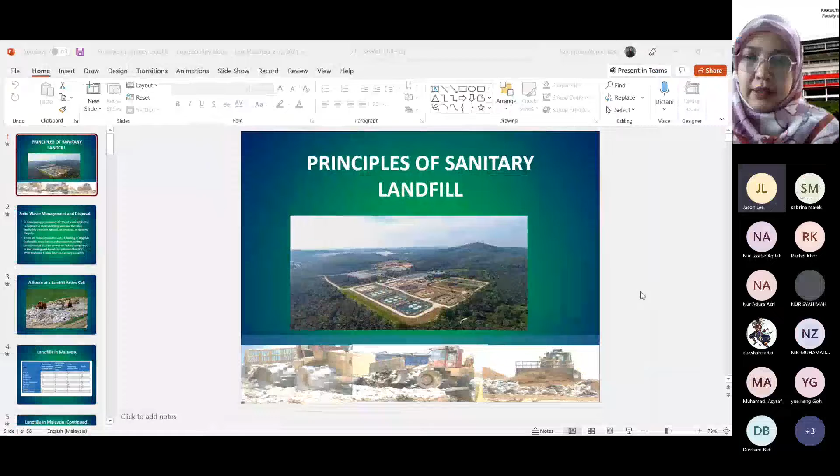Nampak Doktor. Boleh. Alright. Okay, we will continue on the topic of principles of sanitary landfill. Suara saya clear? Boleh dengar? Boleh Doktor. Okay, boleh.

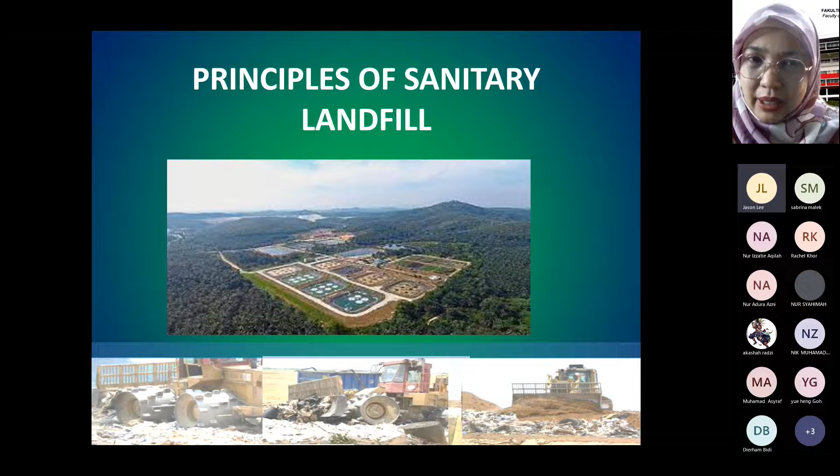Okay, bagus. So we have been discussing about previous treatment options: reduce, reuse, recycle, if possible, before the waste should be disposed at landfill. Landfill is a disposal land or disposal area. I'm sure that many of you have already seen how a landfill looks like, a place where we dispose our waste. Maybe later on I will show you the picture when you are entering the sanitary landfill.

So landfill should actually be a place for waste disposal if we cannot reduce, reuse, recycle, or treat the waste. It should be an option only for the residue of the waste that we generated. However, currently in Malaysia, our main method of waste disposal is using landfill, either sanitary landfill or a normal, general landfill.

So currently about 90 to 95% of our waste generated is being sent to landfill. And it has been so for more than 50 years. Our landfill in Malaysia has been there for more than 50 years. So can you imagine? Most of the landfills have already been full. Currently, it's already full.

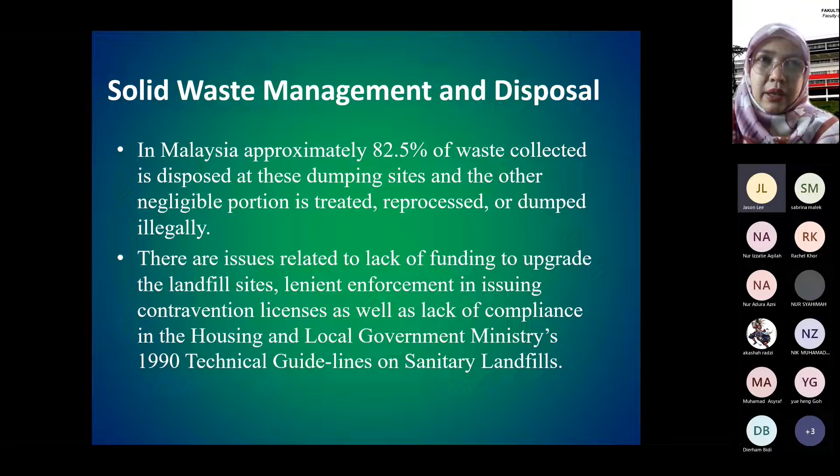Okay, so these are some pictures that I took from the internet. You can see at a landfill there could be various types of waste being disposed, and you can also see there are some equipment, some tools, that are being used at the landfill.

One of them here, if you can see, is the truck that collected the waste from our homes and sent it to the landfill. And here on the left side is what we call a compactor. The purpose of the compactor is to maximize the density of the waste so that more waste can be placed at the landfill.

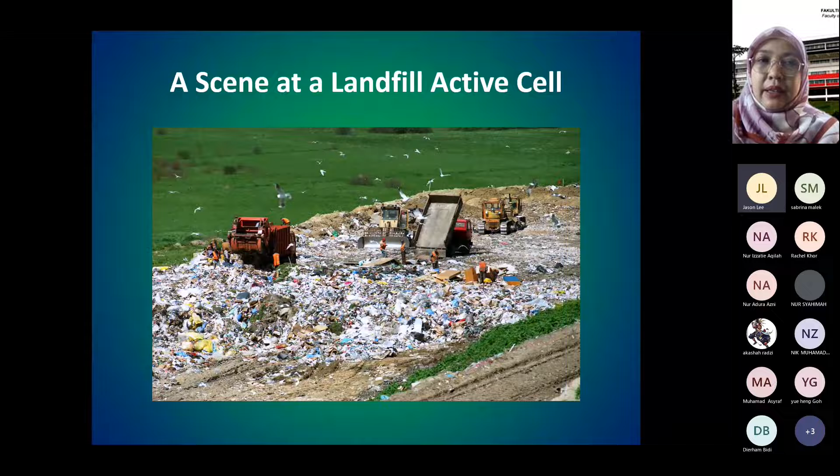So here we can see that there are at least 3 compactors at this cell. This cell is not really big because at the landfill, they don't open all the cells at one time. They will open one cell at a time so that erosion can be minimized. Okay.

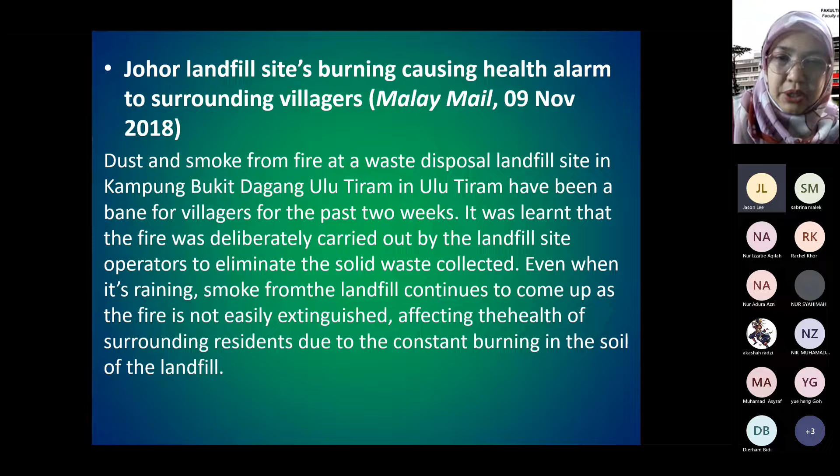So even when it's raining, smoke from the landfill continues to come up as the fire is not easily extinguished. Okay, next, Greenpeace Malaysia, on the 27th of November 2018. It says that Malaysia has become the world's rubbish bin. I think probably you have heard about this.

Developed countries, such as the United States, Japan, Britain, have done recycling activities in their countries, and then they have these recycling products. There was an agreement made by these countries with Malaysia, because Malaysia was thinking that we can take up the recyclable items and use them as a resource for manufacturing.

However, it was found out that most of the recyclable items exported to Malaysia cannot be used as a resource for manufacturing. So it turned out that most of the recyclable items need to be disposed in Malaysia. So it becomes mountains of waste in Malaysia, and that's why they call it the world's rubbish bin.

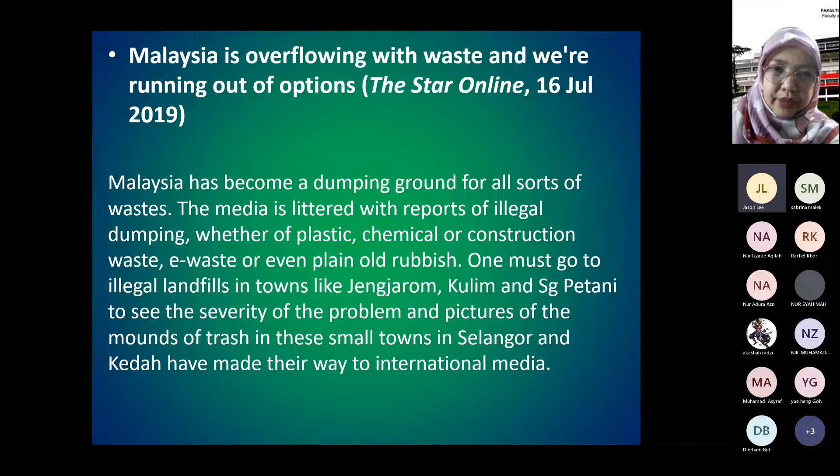So one must go to illegal landfills in towns like Jenjarom, in the Klang area. Jenjarom is one of the largest illegal dumping sites. Kulim, Sungai Petani, to see the severity of the problem and pictures of the mounds of trash. Another one is Jalan Gombak residents claim illegal landfill in KL causing air pollution, still in 2019. So these are the issues that we are facing with illegal dumping.

I've been discussing illegal dumping, and what does it really mean? It occurs when solid waste is discarded or caused to be dumped or placed on any property, either public or private, without proper authorization or legitimate purpose. Illegal dumping is a difficult issue that local and state governments must address on a continual basis.

Why? Normally, when waste is collected from our homes, commercial areas or institutional areas, it is authorized, by the waste operators, the collectors, together with the local authorities. There's paperwork, payment needs to be made. However, illegal dumping is without authorization.

So these are some of the pictures of illegal dumping, either in places nearby housing areas, somewhere people cannot really see when people are throwing it, or even nearby the rivers. So it's still happening in Malaysia.

So what are the causes of illegal dumping? Why are people doing illegal dumping? Firstly, because of lack of legal waste disposal options, which is the primary factor, meaning that a shortage of legal disposal options drives demand for waste removal services, increasing prices.

So as I mentioned just now, landfills are no longer nearby the city. So the operators need to transport the waste from the housing areas in the cities a very long distance. So what happens? They try to reduce the cost by illegal dumping.

Studies also found unit pricing, which involves charging a set price per bag of garbage thrown out, may contribute to illegal dumping, although the intent of unit pricing is to encourage people. So in some places, waste is charged according to how many bags you dispose of. This is not happening in Malaysia, but probably in some other countries such as Taiwan. So the number of bags that you throw is how much you have to pay.

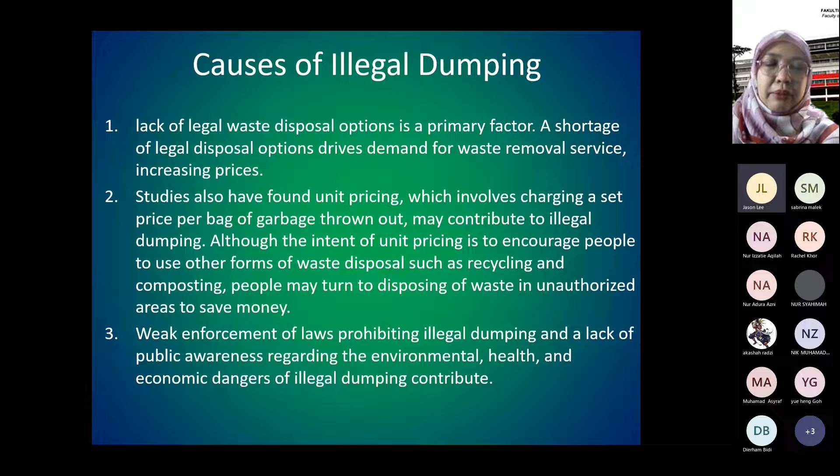So if they are trying to reduce the number of plastic bags, where do they send the waste? Yeah, so they will be sending the waste to illegal dumping. Okay, then weak enforcement of laws prohibiting illegal dumping and a lack of public awareness regarding the environmental, health and economic dangers of illegal dumping.

Okay, that's quite easy. So what are the effects of illegal dumping? The effects are health, environment and economic consequences, may sometimes lead to pollution of the surrounding areas, toxin and hazardous materials. As you have heard in Johor, in Sungai Kim Kim, people are disposing. This relates to toxic waste, or hazardous waste, that they illegally dumped nearby the river.

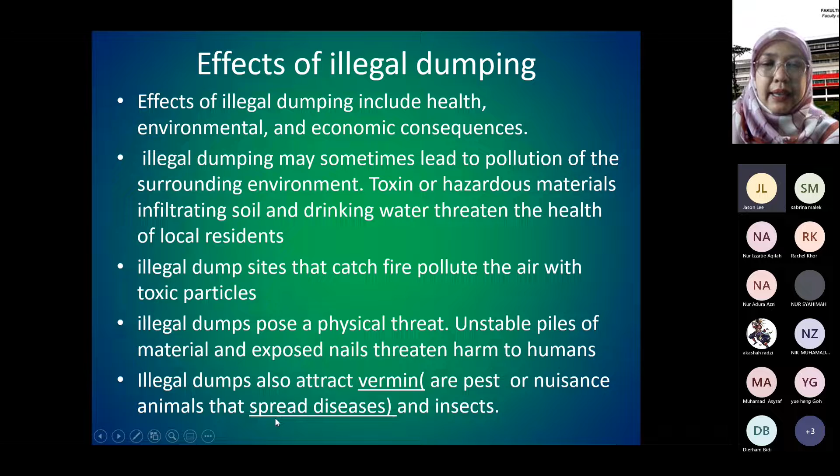Okay, and then illegal dump sites can easily catch fire and pollute the air. It poses a physical threat, and unstable piles and materials, exposed nails, threaten harm to humans, and then attract vermin, or what we call pests or nuisance animals that spread diseases, and insects as well.

Okay, so now back to the landfills. If we are talking about landfills, there are various types of landfills. You have heard about open dumping, landfill, I've mentioned it to you just now, sanitary landfill, and then hazardous waste disposal, or hazardous waste landfill, which is called secure landfill.

So there are various types of landfill, because what we thought is that when we send the waste to a disposal site or disposal area, we just call it landfill, or in Bahasa Malaysia tapak pelupusan. We call it landfill or tapak pelupusan. However, there are different types of landfill.

Okay, so the first one is open dumping. Open dumping is so simple. The local authority, Majlis Daerah, Majlis Perbandaran, used to have open dumping practices for waste disposal, meaning that they found an area which is suitable, close by the city probably, and then they just send the waste to this area and leave it there for many years until the land is full with waste. So that's what we call open dumping.

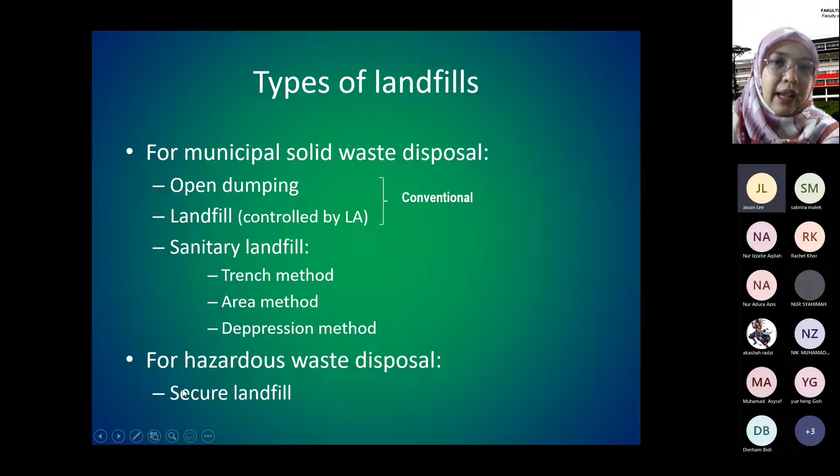And then people are also talking about hazardous waste landfill, and it is called secure landfill. Regarding this, we will learn about it in the topic hazardous waste management. Okay.

Okay, so the first thing is open dump. It is defined as a land disposal site at which solid waste is disposed of in a manner that does not protect the environment. So that's what I mentioned, it doesn't consider the environment. And it easily gets burning, and is exposed to elements, vectors, and scavengers.

Okay, scavengers, if you ever heard about scavengers, are people who work at landfills, sometimes illegally or legally. These people will take valuable items from the landfill that can be recycled. And they also mentioned that they've sometimes found gold or money that people accidentally threw away in the landfill.

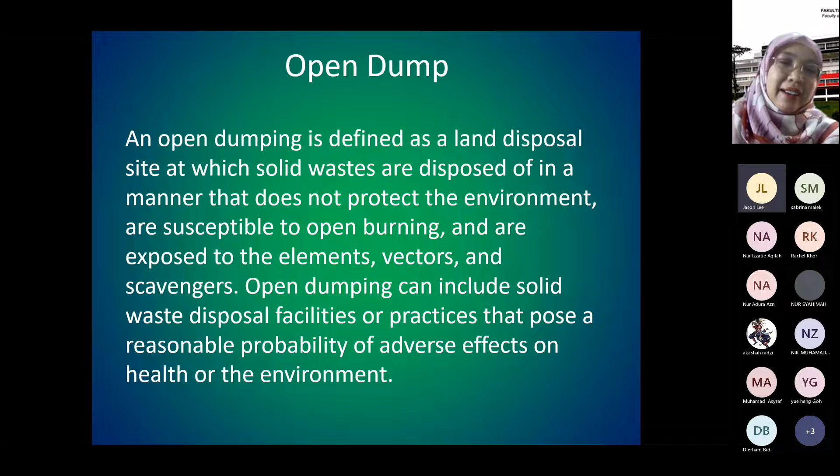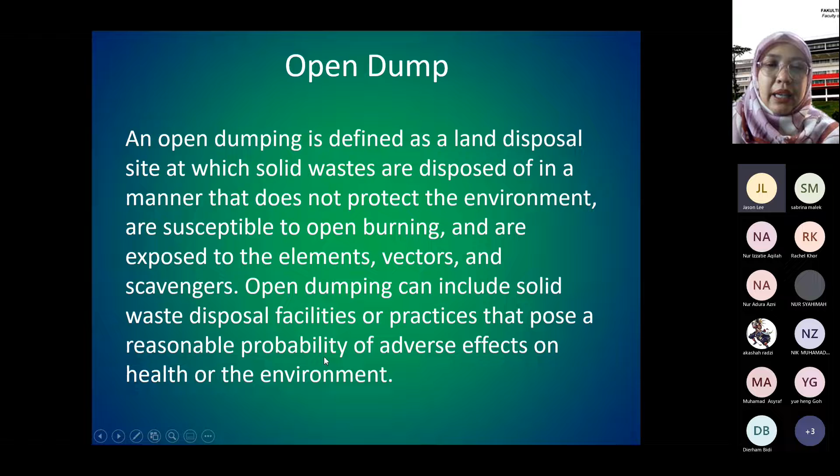So sometimes they can get, not that they can get really rich, but at least they can earn daily so that they can eat every day. So it's like a source of income to them. It can be a part-time job or a full-time job for them. Okay. So open dumping can include solid waste disposal facilities or practices that pose a reasonable probability of adverse effects on health or the environment.

Okay, controlled landfill. Landfill is the most common solid waste disposal method. So I mentioned just now open dumping. The second category is controlled landfill. This is the most common disposal method, and it is a simple procedure, low cost, with a landscape restoring effect.

The primary objective of landfill site design is to provide an effective method to control and prevent negative effects on surface water, groundwater, soil, and air. For final dumping of solid waste, the landfill is the most efficient way to settle the collected waste. So normally local authorities will opt for this option, which is controlled landfill with minimal environmental considerations.

Next, landfills. Even for landfills in Malaysia, there are various types that they can choose from. So it can be anaerobic landfill. Anaerobic landfill means that when the waste is dumped at the landfill site, oxygen could not get into the waste. So the biodegradation process will occur without oxygen. That's the first type of landfill.

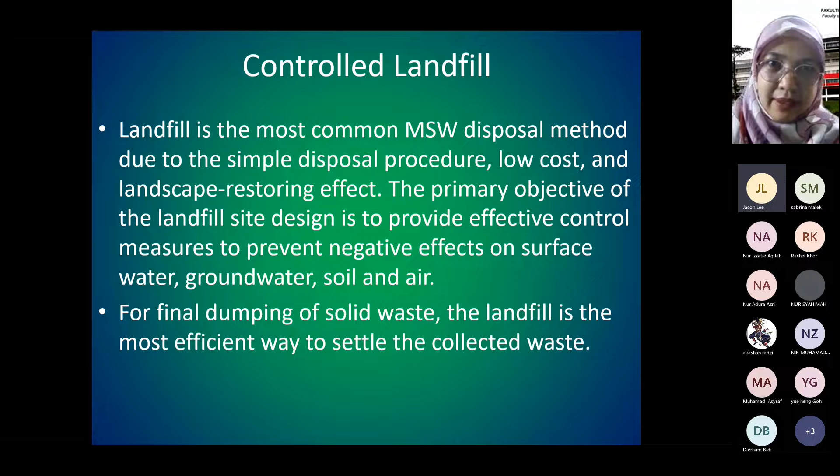And lastly is aerobic landfill with forced aeration. In some landfills, oxygen is introduced, and normally they use a blower to introduce oxygen to the landfill site. So I've already introduced to you open dumping, then controlled landfill, and even controlled landfill has different categories. The next one is sanitary landfill, which is considered the latest technology for a landfill.

So what does sanitary landfill mean? By definition, sanitary landfill is a land disposal site that employs the principle of spreading waste in thin layers, compacting the material to the smallest possible volume, and applying cover material at the conclusion of each operating day. Simply, sanitary landfill is an engineered method for land disposal of solid and hazardous waste in a manner that protects the environment. It has the maximum protection for the environment in terms of considerations and technologies involved.

Within the landfill, physical, chemical, and biological processes occur. It is like a very large bioreactor where the organic waste will be degrading naturally. However, plastics and other non-biodegradables cannot be degraded, of course. Only organic materials can be biodegraded. You can imagine these processes occurring on a large scale, degrading the solid waste and producing odor, leachate and gases. Sometimes if you enter the landfill site, you can already smell the bad odor.

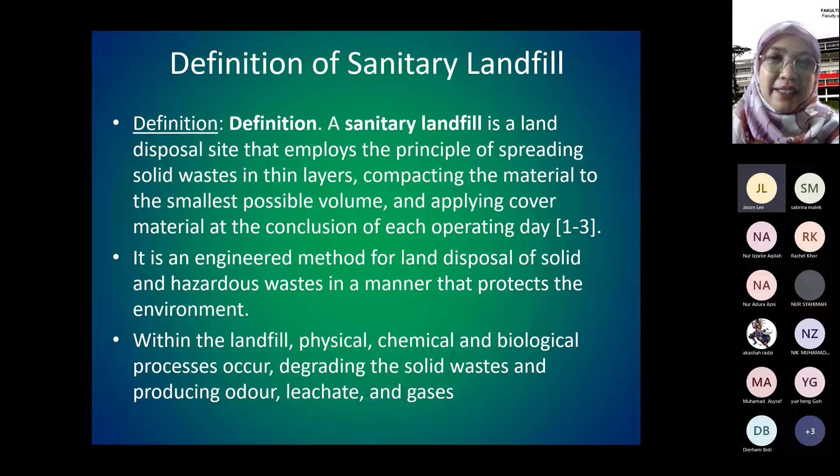Okay, no question. So what are the purposes of a sanitary landfill? Okay, the main purpose of a sanitary landfill is to ensure waste is safe by reducing the harm from accumulated waste and allowing safe decomposition.

Can you imagine if nobody collects the waste from our home? Even after 2 days, 3 days, if nobody picks up the waste from our home, the smell is really bad. You can see that the surrounding area doesn't look very good. So this job is very important to human beings. Manage the waste.

So the alternate layering of garbage and soil aids in hastening decomposition. Because methane, a toxic gas, is produced from decomposition, it is collected in a landfill to generate electricity. So in a sanitary landfill, from the anaerobic biodegradation process, methane gas will be produced and it can be collected, and we can recover energy, or renewable energy can be obtained from the landfill.

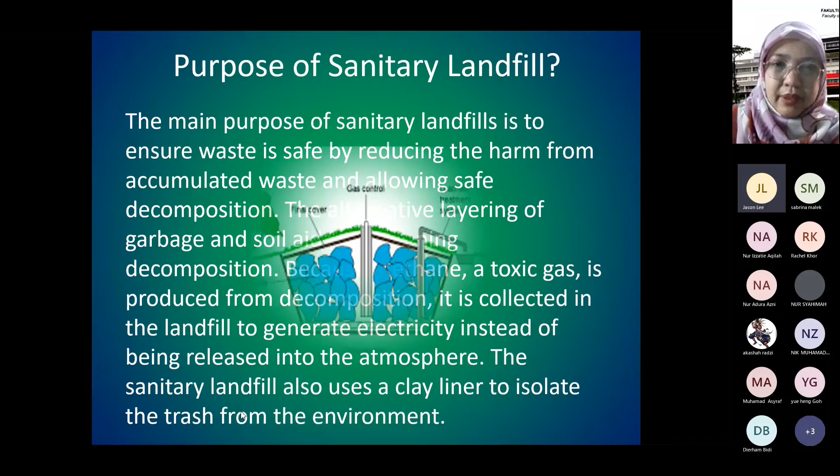Okay, so how does it look like? Just a simple figure to show a sanitary landfill. Here we can see the groundwater flowing underneath. This would be a lining system, at the bottom of the landfill and also at the side of the landfill. We will learn about the lining system in next week's lesson. Actually, it can be made of very hard plastic, HDPE plastic, and it can be layered.

After the lining system, we will have a leachate collection system. That means a piping system will be placed at the bottom of the landfill, so that leachate coming from the waste can enter the piping system. The pipes are perforated, meaning that there are some holes designed along the pipes, and leachate can enter through them and be collected from the landfill site, and it should be treated. Sometimes we can also recover energy from the leachate as well.

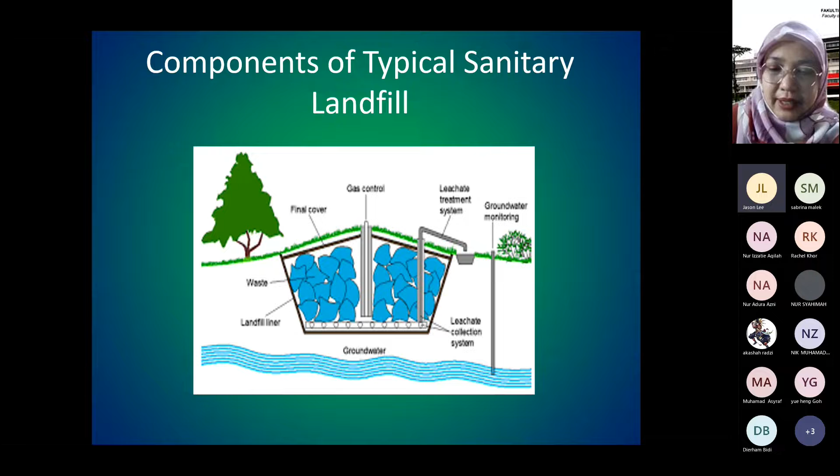Okay, are you clear now? All right. Thank you, Doctor. Okay, so I will continue.

Actually, you can watch the Bukit Tagar Sanitary Landfill video. You can watch it on YouTube. Actually, Bukit Tagar Sanitary Landfill is probably number 2, meaning that the earliest sanitary landfill in Malaysia was in Air Hitam Puchong, which is nearby Seri Kembangan. It started its operation in 1995 in Air Hitam Puchong, and it continued because it served the KL and Selangor area, in Seri Kembangan.

So it closed very fast. I mean, the landfill got full very fast, and it was full and closed around 2009, 2010, something like that. The lifespan should be around 20 to 30 years, but it was shortened to like 15 years because of the amount of waste being sent to the sanitary landfill. So it was like half of its lifespan. So it was the first one in Malaysia, Air Hitam Puchong in Seri Kembangan.

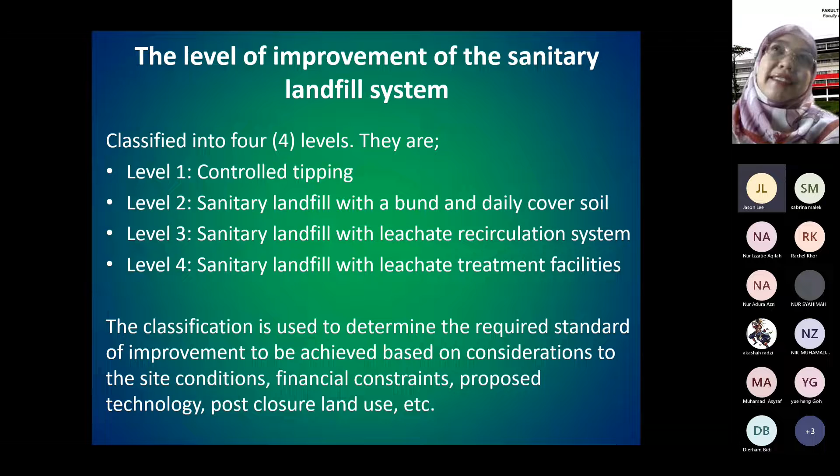Okay. Do you understand what I'm trying to say? There are so many categories and levels, but still it is under the category of sanitary landfill. Okay. So facilities for sanitary landfill. This is what I mentioned, level 1, 2, 3, and 4, so it's explained here.

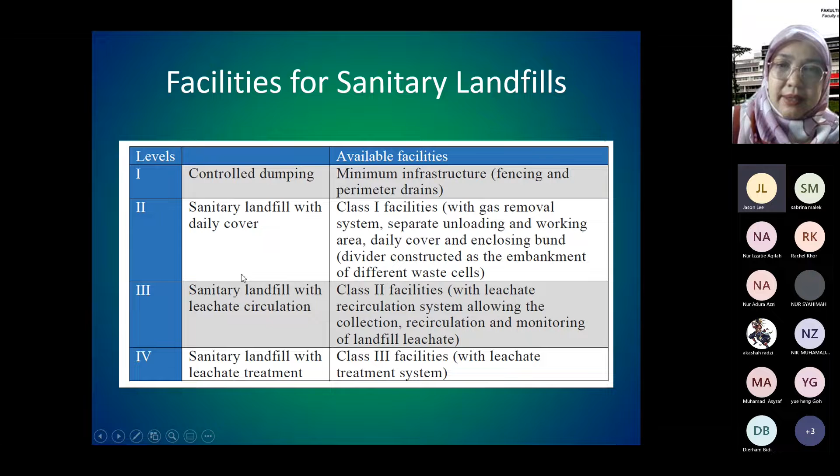Okay, so planning for a landfill. What's the area required for a landfill? It depends on the planning of the landfill. It can be planned using short-term planning, which is a 10-year frame, or long-term planning, which is a 30-year frame. The target lifespan, the designed operational duration of the landfill site, should be set at approximately 15 years of operation, similar to what we had in Air Hitam Puchong, nearby Seri Kembangan, which was 15 years of operation.

Actually, if you go and visit that area now, it looks like a recreational area, where you can jog and walk. It's currently like a taman. However, underneath, the biodegradation process is still occurring, and the landfill operators are still monitoring the post-closure. They are still monitoring the water quality at the river nearby and the methane gas production.

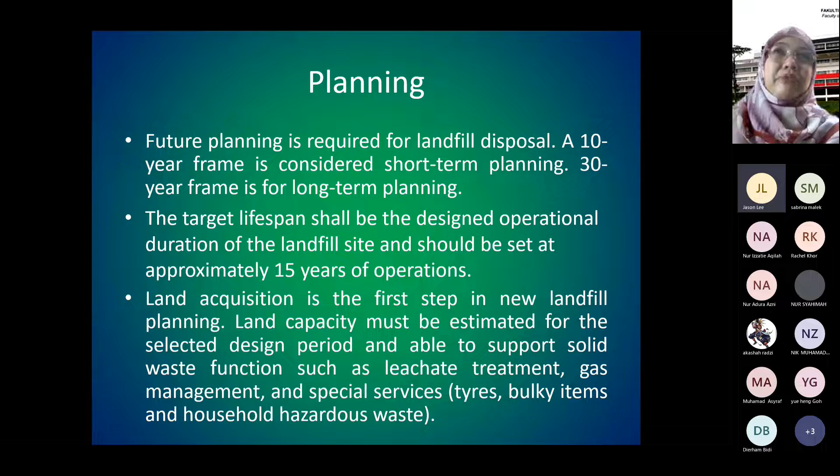So that is why it is important for us to divert the waste that we generate from our home away from landfill, because the cost will keep increasing as the land is getting further and further, and even the cost of the land is getting more expensive each year.

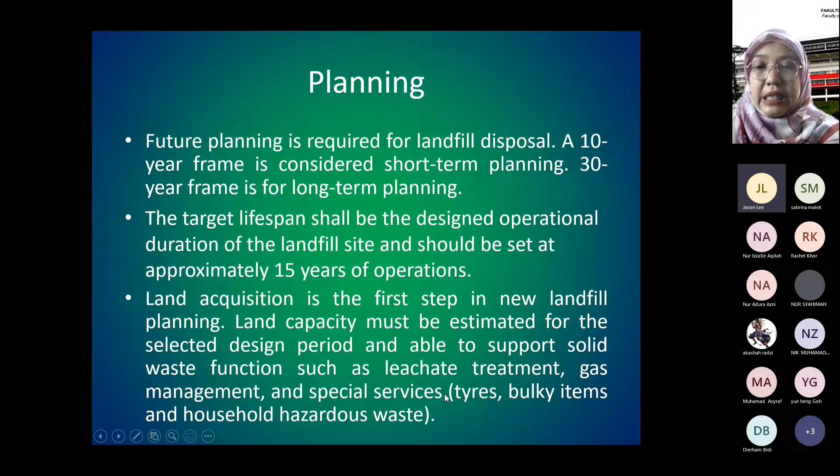Okay, what else? Land capacity must be estimated for the selected design period and able to support solid waste functions such as leachate treatment, gas management, and special services such as tires, bulky items, and household hazardous waste. So consideration for these items should be made as well.

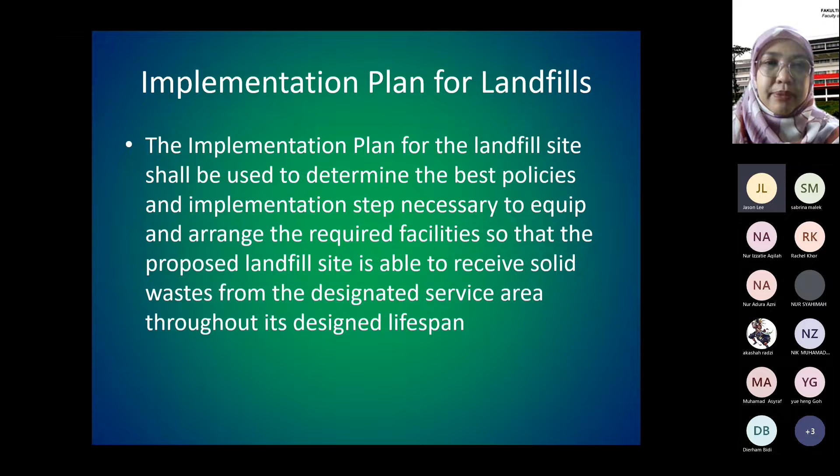Okay, the implementation plan for the landfill site shall be used to determine the best policies and implementation steps necessary to equip and arrange the required facilities so that the proposed landfill site is able to receive solid waste from the designated service area throughout its design lifespan. So the implementation plan is important.

And then implementation of plans generally. Plans shall be implemented according to landfill management activities as follows. It starts with stage 1, planning. Stage 2, design and construction. Stage 3, operations and maintenance, meaning daily waste transported to the landfill, and maintenance.

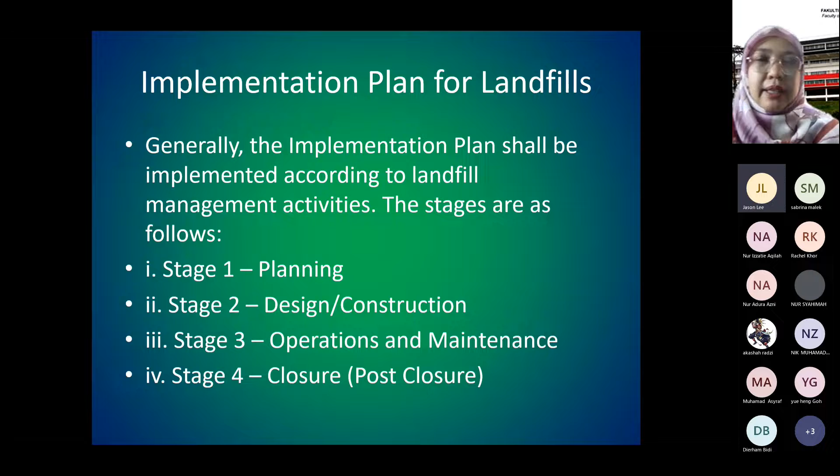And the final stage, at the end of 20 years, at the end of the lifespan, is the closure stage, meaning that the post-closure monitoring that I mentioned just now should be continued.

Okay, so establish the requirements for the landfill site. The site must provide sufficient landfill capacity for the selected design period and support any ancillary solid waste functions, such as leachate collection and treatment, landfill gas management, and special waste services for tires, bulky items, and household hazardous waste. So these items may be separated.

If you know, in Dengkil, near UKM, there's a sanitary landfill that is special, because it only collects bulky items, tires, and household hazardous waste so that they can be disposed of there. So it is called a special landfill site, or a special sanitary landfill for special services only.

Okay. And then facilities for handling recyclable materials. Normally at the landfill site there's what we call an MRF. I think you have learned about MRF, meaning a centralized facility to collect recyclable materials and prepare recyclable items to be sent to factories.

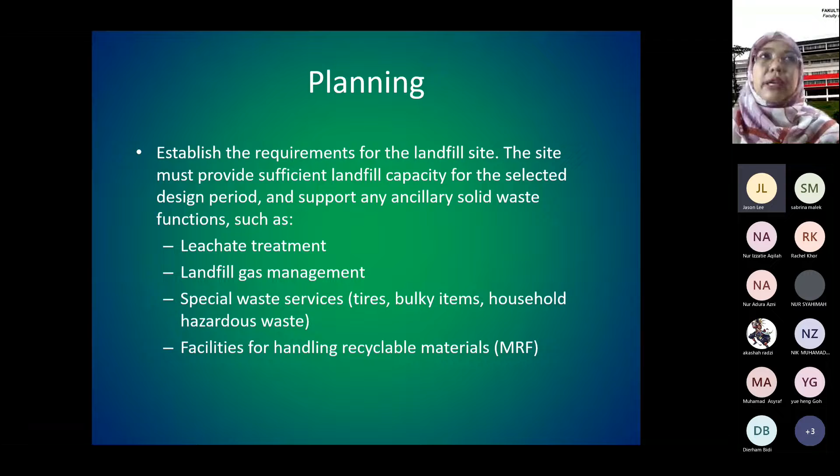In the ones I've been involved in as a panel member, there are various proposals for incineration, refuse-derived fuel, an incineration facility that includes a sanitary landfill and also an MRF. The ones I was involved in were the Sungai Udang landfill in Malacca, and also in the Johor Bahru area. Similarly, they would have the same facilities, a landfill together with treatment of waste.

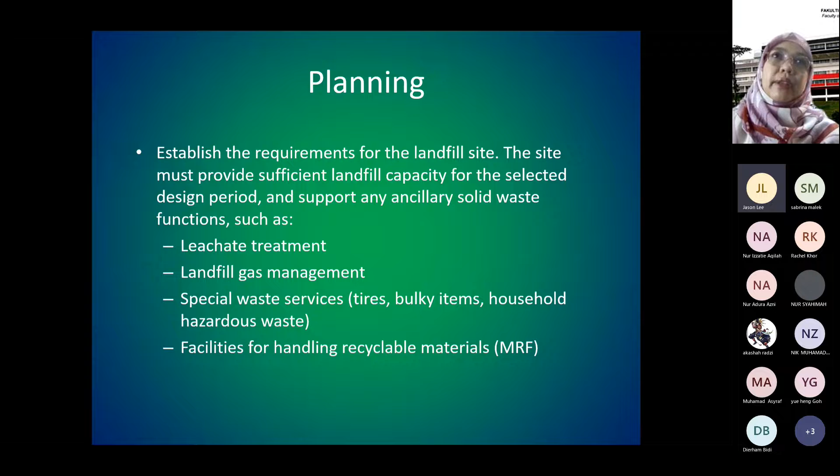Okay, data needed for determination of landfill capacity. So what data are required? Waste disposal requirements for the communities, using historical records of population and waste generation from the last several years. This is taken from the statistics department, identifying the population in that area.

The density of compacted waste in the landfill, so how much waste can be compacted, and also the volume of daily and final cover materials. Because for a sanitary landfill, the waste needs to be covered daily by soil. Cover material normally takes up a total of 20 to 50% of the total volume of a landfill. So consideration of the daily cover materials should be made as well.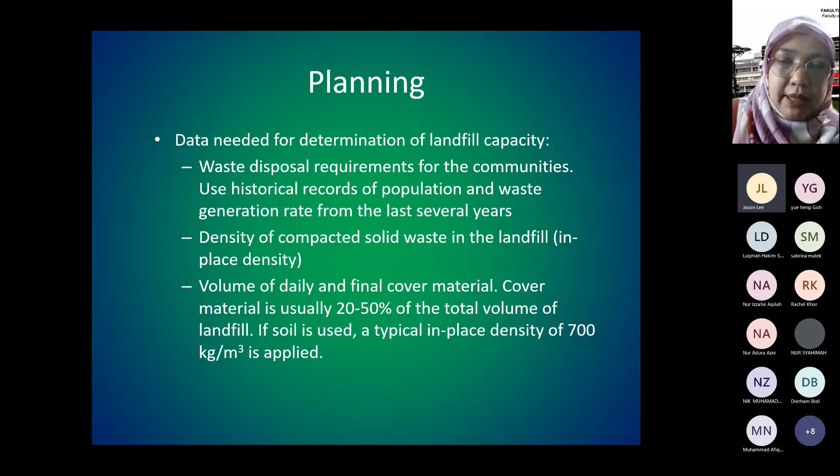And if soil is used, a typical in-place density of approximately 700 kilograms per cubic meter is applied. So a typical density at a landfill in Malaysia is approximately 700 kilograms per cubic meter. Okay, what other factors affect the volume of landfill? So new regulations will affect, yeah.

So waste diversion. If the government says that it is necessary to divert the waste by a recycling process, that means less waste will be sent to landfill. So if there's a new regulation, less waste will be sent to landfill. Yeah.

Competing facilities. For example, new landfills may exist that would receive some of the waste. So probably there's another new landfill in the area, so half of the waste will be sent to the other landfill. Yeah. Different cover option. Okay. If soil, as I mentioned, about 20 to 50% of landfill volume. If we use other materials, it can probably be reduced.

Yeah. And then change in residential and non-residential waste generation rates. So this may be due to awareness programs, fewer plastic bags being used by the public, by the community. So a change in our behavior, change in the community behavior, means less waste will need to be disposed at landfill. Okay.

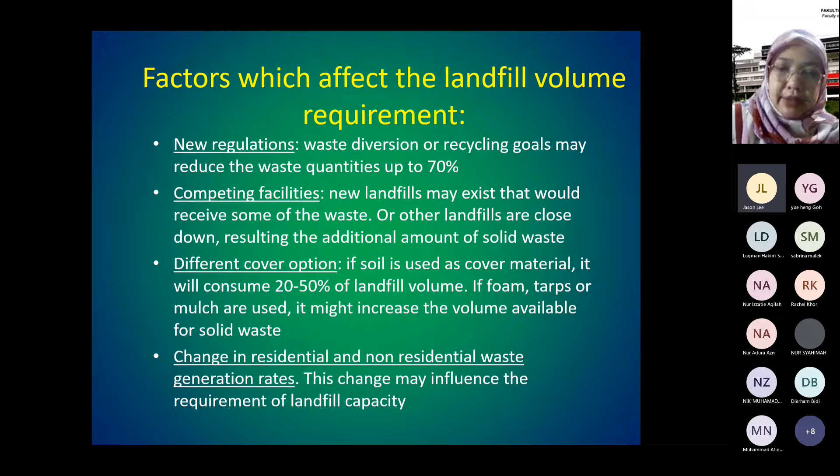Now, what is the process of selecting the best landfill site? There's a rule of thumb that needs to be considered. It shouldn't be near a floodplain area, near a wetland zone, near a seismic zone, near endangered species habitat, not too close to the airport, because landfill sites normally attract birds, lots of birds, especially seagulls. Birds can sometimes interfere with the flights.

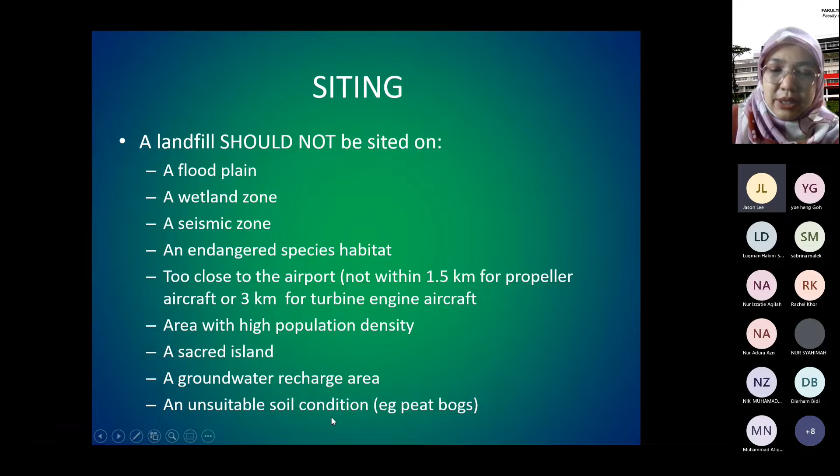So not too close to the airport, not in an area with high population density, not too close to a sacred island or resort island. Not a groundwater recharge area, and it shouldn't be sited on unsuitable soil conditions. Okay, other qualitative features to be considered.

So if we are using GIS, for example, trying to find an appropriate location, you have to identify the land use nearby, the population density, groundwater quality nearby, site topography, ownership. Of course, it is important if you are a government agency developing a landfill site. It shouldn't be privately owned land, otherwise you have to pay for the land.

The soil condition, and also proximity to the centroid of waste generation, meaning that it's not too far away from the waste generation. What else? It can be the most difficult obstacle to overcome in developing a new landfill. So normally what the local authority will do is try to upgrade the current landfill. If land is still available, they will expand the land area, or they will include other facilities, like a composting facility nearby so that some of the waste can be composted or incinerated.

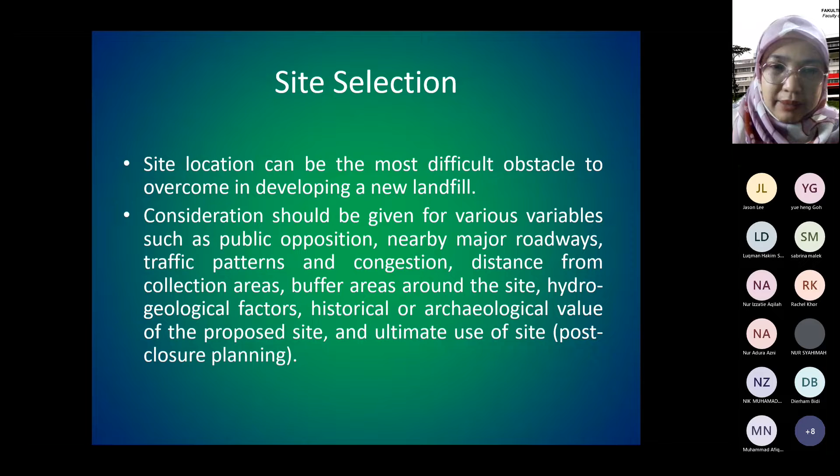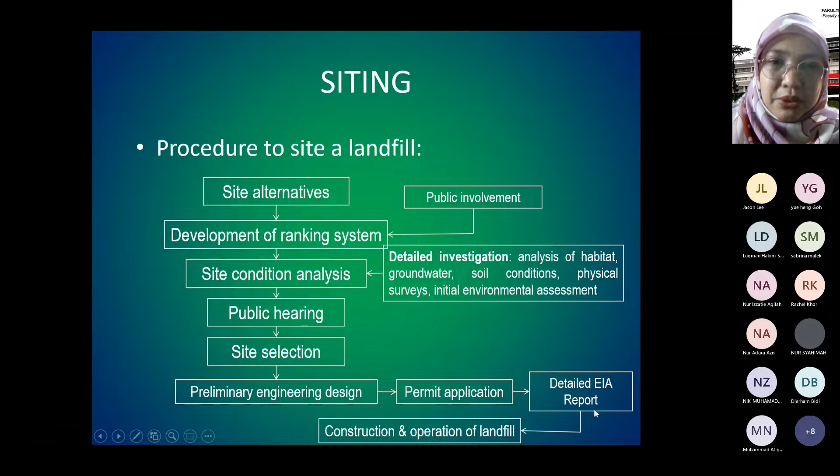All right, this is the site selection process. And as I mentioned, a landfill site should pass through the detailed EIA process before construction.

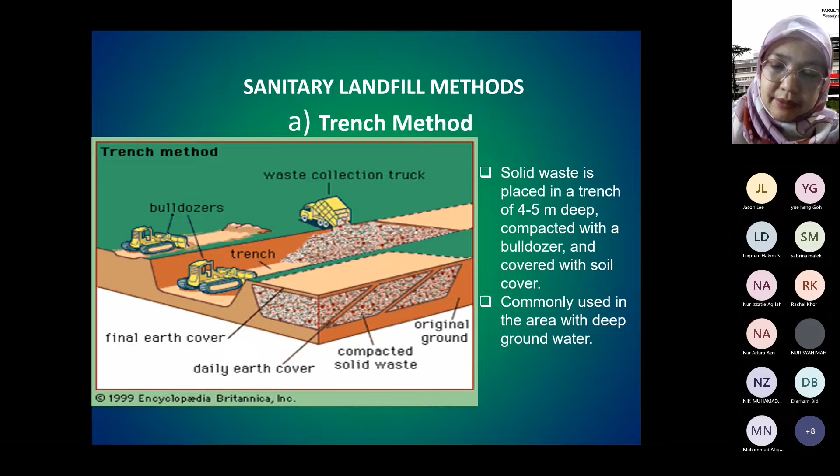Okay, and this is the trench method, whereby excavation will be required for the waste to be dumped at the site, meaning that the cell will need to be excavated and then only the waste can be placed in the cell.

The next method is the area method, whereby excavation is not required. The land is already suitable for the waste to be placed there, so immediately the waste can be disposed of, placed on that area.

And the last method is the depression method, which means, for example, there's a lombong, a quarry area that's no longer in use, or in the United States they call it a canyon. There's a place where they can just dump the waste without excavation being required.

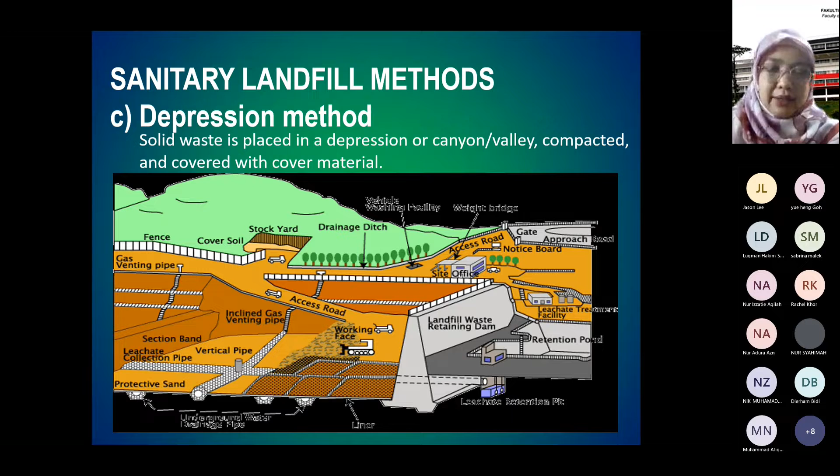Okay, so I've already mentioned the landfill scheme. And this is how it looks during the construction of a sanitary landfill, whereby at the bottom of the landfill you need to provide a lining system, which can be made of hard plastic such as HDPE and others. There should also be geotextile included at the bottom of the landfill. We will learn about the detail of a lining system in our next lesson.

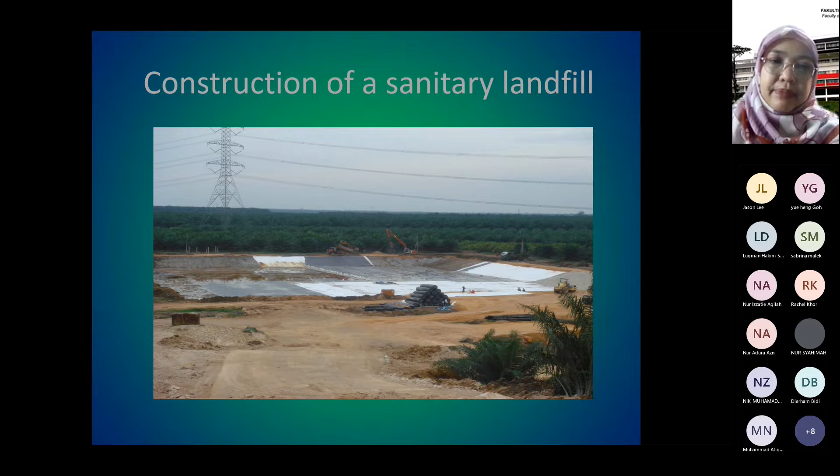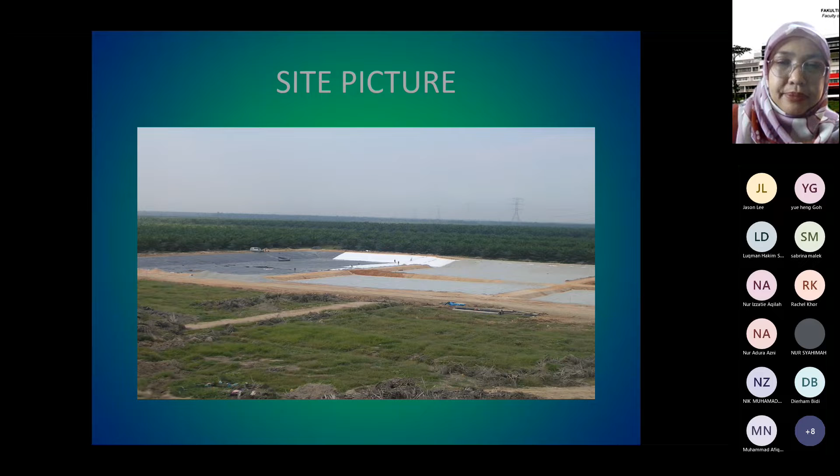Okay, so these are the activities for putting on the lining system. And this is where the waste has already arrived at one cell at the landfill, and it will be pushed to one side of the landfill and compacted by a compactor.

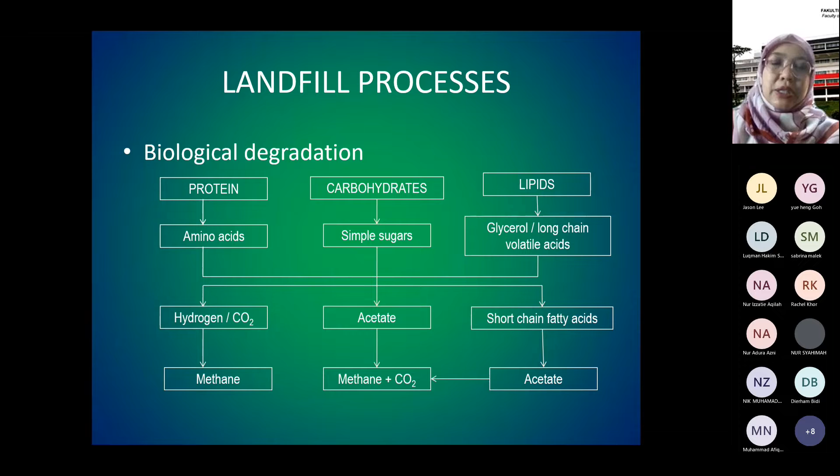Right, I think we have already discussed biological degradation, and this is similar to the anaerobic digestion process, whereby organic materials containing protein, carbohydrates and lipids undergo anaerobic digestion, and eventually methane gas and carbon dioxide will be developed. So it is a similar process. That is why methane gas will be produced, and it needs to be managed appropriately.

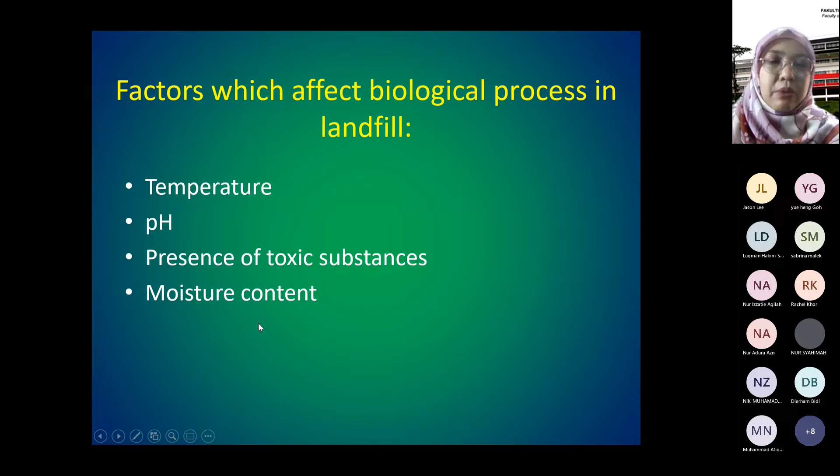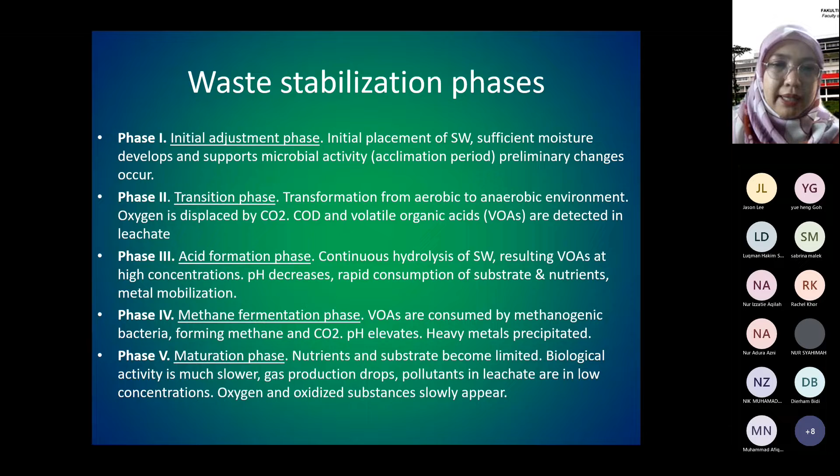Okay, factors which affect the biological process. You can imagine how big the bioreactor of a sanitary landfill is. So you need to manage or monitor the temperature, pH, presence of toxic substances, and also moisture content, for the microbial process happening in the waste. It's similar to the anaerobic digestion process, so I don't have to repeat it again.

And of course, a sanitary landfill is considered a low-cost, low-technology process compared to other treatment options, such as incineration, which is more expensive, or in-vessel composting. But still, it can function as an appropriate waste management option.

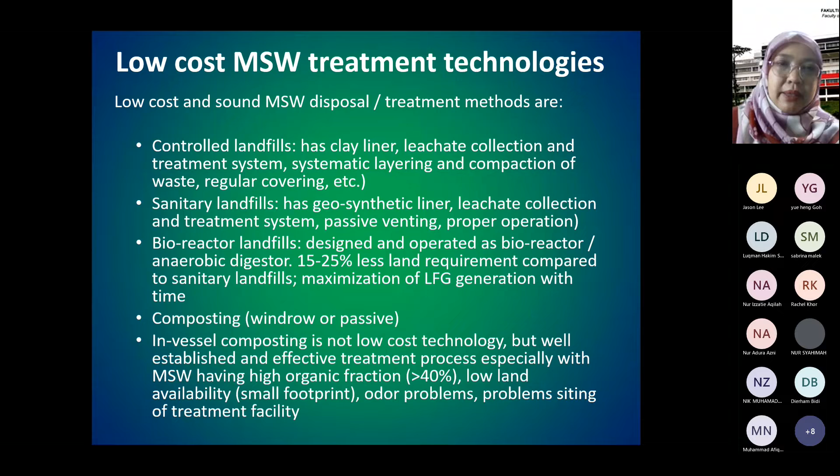Okay, I think you already have the soft copy of the textbook? There are examples in the textbook: example 4.1 about solid waste compaction in landfill, an example calculation to estimate landfill capacity, example 4.3 for estimation of leachate generation, 4.4 landfill gas estimation to estimate how much landfill gas will be produced, piping spacing, and estimation of gas pressure in pipes. Small, simple calculations are given.

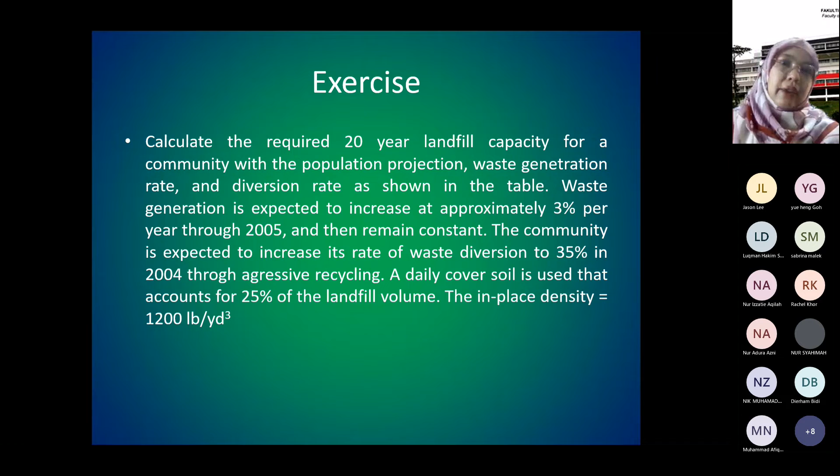Please look through these examples, as I will be taking similar examples as part of the questions in the exam. If you require explanation or discussion, we will do that later on, probably next week or before the test. It's a test, not a final exam. Okay, so these are the questions from the textbook. You can read through them first, try the exercises, and we'll discuss if you have any problems.

All right, so that's it for the introduction to a sanitary landfill.